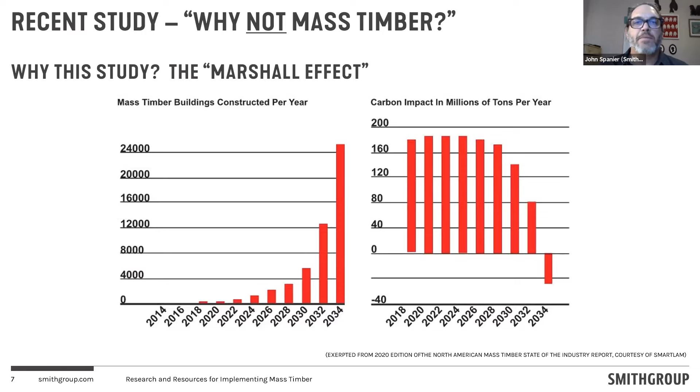Aligned with this is a recently coined Marshall effect that came out of the 2020 edition of the North American Mass Timber State of the Industry Report, which I have links to later in this paper. This Marshall effect describes that if the number of mass timber projects doubled every two years, then by 2034 the North American building industry will be carbon neutral. That's crazy, and it's one of the big reasons why we want mass timber to be a popular construction system.

The big question is, why are we not building more mass timber projects? I've been asking myself this question for a really long time. I decided I just wanted to know, so I reached out to as many clients and industry professionals that would talk to me.

Specifically, I was reaching out to people who had considered mass timber early on in a recent project but ultimately didn't use it, to identify that decision gate early in a project and understand why it didn't happen.

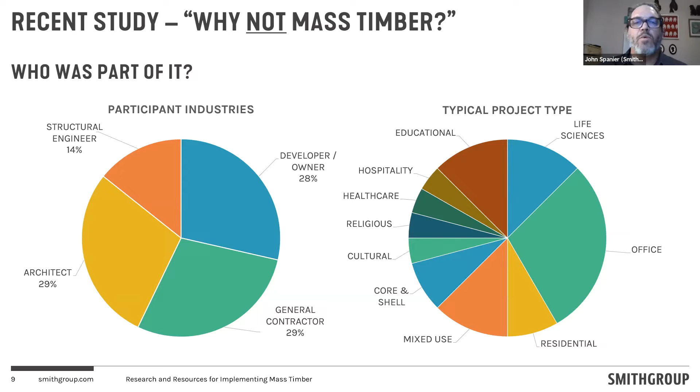The people willing to talk to me include a broad spectrum of people who are part of that decision process. I was lucky enough to talk to colleagues at Harvest Properties, Stanford University, Turner Construction, Build Group Construction, Tom Robinson at Lever Architecture, and colleagues at SmithGroup and Arup, and really grilled them about what had happened recently on projects that hadn't proceeded with mass timber.

The results were these - going over the identified risks and advantages. The main reasons people saw as true obstacles to mass timber are cost and supply chain variability, and the lack of data, both in terms of market value, market placement, user experience, building performance, and that kind of thing.

Also lack of team experience, primarily with general contractors and structural engineers, unfortunately. Another one was the risks to approvals and permitting, and the ongoing struggle to get mass timber codified for use as a seismic or lateral system.

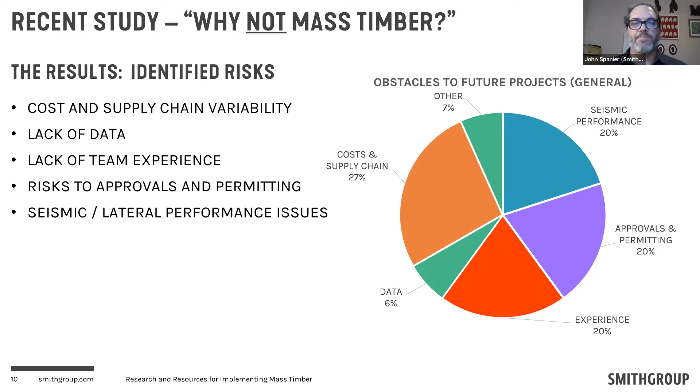I think if you put your client lens on, what we're really looking at is predictability, as far as the advantages that were identified.

Everybody I asked if they wanted to do a mass timber project, 100% of them said yes. There really is a sense of the intrinsic value that mass timber brings to a project. There's an assumption of market and asset value, an assumption of quality, an assumption of a desirable look and feel. There are actually quantifiable construction efficiencies, and there are real carbon advantages. Some of these we have information on, some we don't.

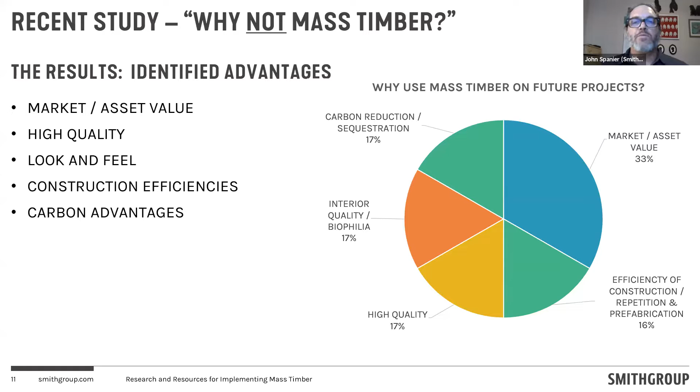Interestingly, I've been lucky enough to be a footnote in an upcoming research paper that Woodworks and the Wood Products Council has done for ClimateWorks. It's hopefully coming soon. We have colleagues from the Woodworks group, Mike Romanowski and Jennifer Cover, also on this call, hopefully available to answer some questions.

They surveyed 84 different projects that had considered using mass timber and ultimately didn't do it. Theirs is way more in depth, tracking these projects for a longer period of time, but it's validating to see that what I've seen so far has been very similar to the results that I got.

One thing I want to stress here, if there's one takeaway you have after listening to this talk, is that we absolutely need to give our clients more predictability. That's the whole thing. If you think about it, you're a client trying to figure out, well, is my project going to be successful?

Is my project going to make money? They need to have understandable information and reliability to be confident in making the decision to take on mass timber. So I'm going to go through these one by one, both the risks and the advantages, and give you a sense of some resources that I think will help you prepare for any upcoming mass timber project you want to take on.

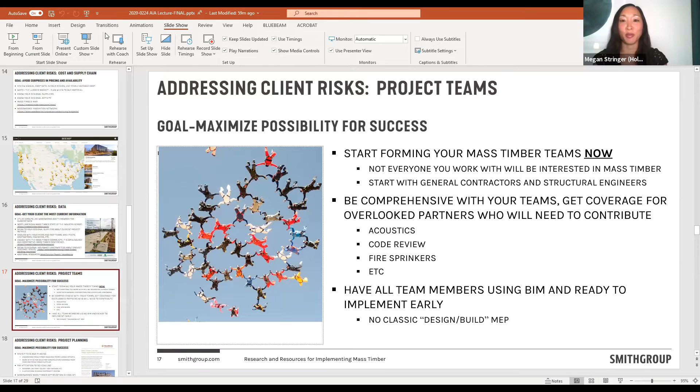Yeah, thank you for doing that. We've been seeing a lot of similar things in our studies. One thing I'll mention is, with wood, a lot of the biogenic carbon aspects and the sequestration and how that should be accounted for is definitely something that, at least among the structural engineering profession, we don't yet have a good consensus on. It's something we're working on within one of the committees I'm involved in, so we should hopefully have a bit more guidance out there, because it's definitely a hot topic in our profession right now.

Hey John, you're back now. Hi, I'm back, I apologize. I don't know what's going on, but hopefully that was the last of it.

Some information: the recent State of the Industry report for North America mass timber is a great resource, a ton of information in there. I can't recommend it enough.

Talk to your regional suppliers, talk with your peers, there's all sorts of stuff. I can talk with Megan, I can talk with my friend Thomas Robinson or whoever is working on these projects, and there's all sorts of shared information we can glean from each other. The mass timber community itself is a great resource just alone, it's very open source and super cooperative. Woodworks is part of that, and the Mass Timber Conference is coming up. I'd highly recommend it, that's a great place to go if you're interested in mass timber.

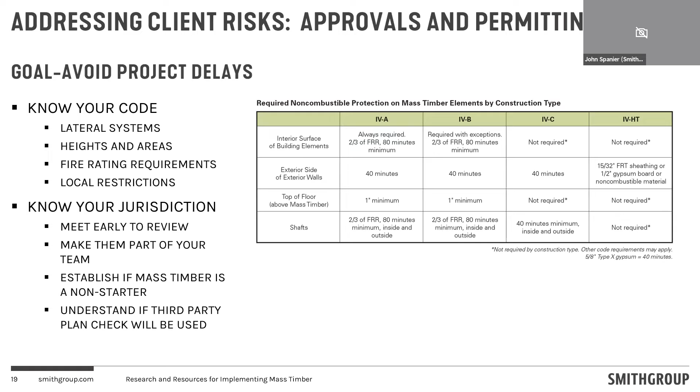Seismic performance. This is one that came up over and over again in the study, and it's really because it's just not codified yet. If you want to use the mass timber lateral system, you have to do your alternate means and methods request. That's lengthy, complicated, peer review, expensive.

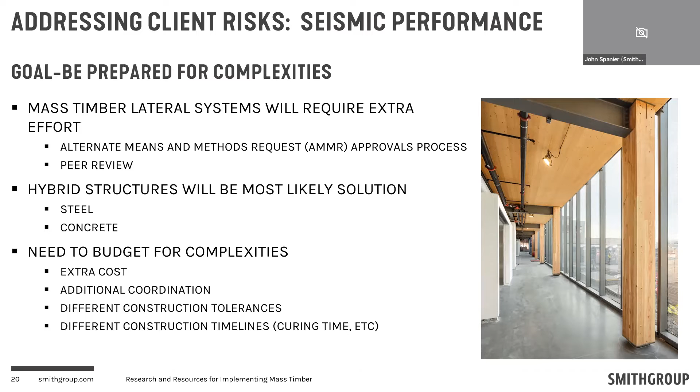Chances are you're going to do a hybrid structure, so you've got to understand what that means. You're going to either use steel or concrete. Those have different advantages, disadvantages, complexities. There's a little extra cost, a little extra coordination, different construction tolerances to keep in mind. Your joints, any connection points, are really critical. And different construction timelines, particularly if you're going to do cast-in-place concrete, it's got to dry. So you've got to figure out how that's going to go up while your wood system components go up much quicker. And they're also water averse, so you don't want to have them up against wet concrete.

Client advantages. There are a lot of great client advantages: value, perceived quality, the look, the feel, construction efficiencies, carbon advantages. The mass timber report is a great place to look at for starting to flesh out the idea of the ownership of a mass timber building. They go through some of the things you want to keep in mind, some of the risks. There's still not a lot of data about this. Hopefully this is going to keep growing.

Quality, right? How do you point out quality? One of the things that came up is it's hard for clients to see projects, to experience projects. So unless there's stuff in your region that you can take people to visit, you've got to convince them and give them metrics around other successful projects.

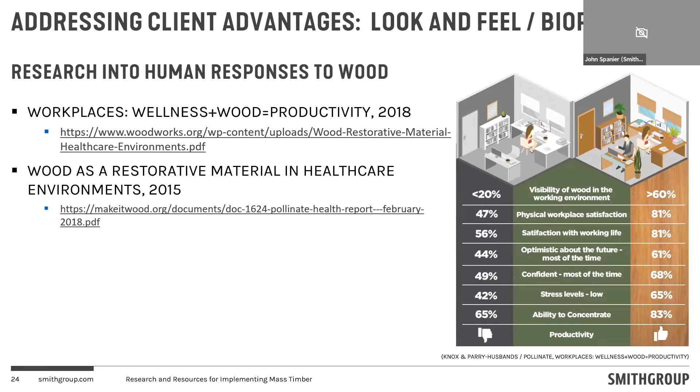Big one: construction efficiencies. This is really where mass timber shines and starts to have a lot of great information. Again, going to the optimization checklist—please read through this, it's really super informative. Understand your structural grid. The difference between mass timber and steel and concrete is a completely different thing, with completely different advantages and strategies for getting an efficient structure. And you can do it in ways that create really open areas.

Holmes Structures has this awesome timber builder optimizer tool—I think Megan's going to show you in a minute. Fast+Epp has this timber bay calculator, a free tool online. Take a look at all these things.

You really have to explore and have a great structural engineer on board who understands these nuances, and be repetitive. If you want to save money on these projects, you can still have a beautiful project and be intelligent about prefabrication. You're going to save money by having the same size shapes of components as much as possible. It's going to make it faster to go together, faster to produce. Significant cost savings can be realized.

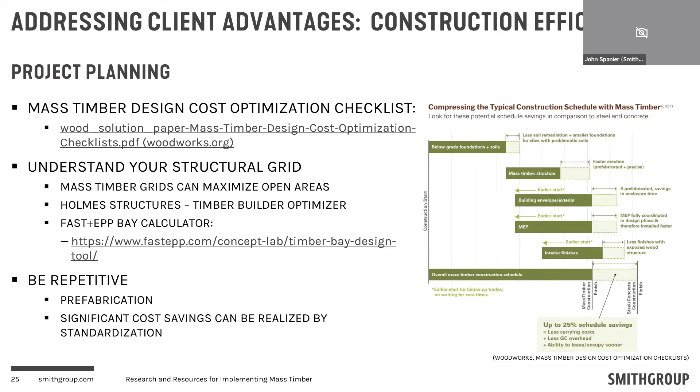It's a great tool to track the carbon impacts of a mass timber project. This pretty much comes to the end of my part of the presentation.

The call to action to you guys: if you're an advocate of mass timber projects, you have to start with your client. This whole thing I'm trying to get across today is you have to put your client hat on and understand where they feel comfortable, where they feel uncomfortable, and come at this with a toolkit, a good team, and a lot of understanding about what's going on in the current marketplace. Hopefully we've given you a little bit to look at and start to develop your understanding about mass timber with this stuff.

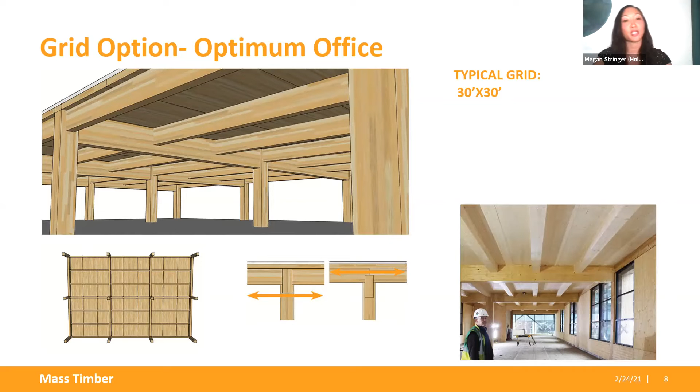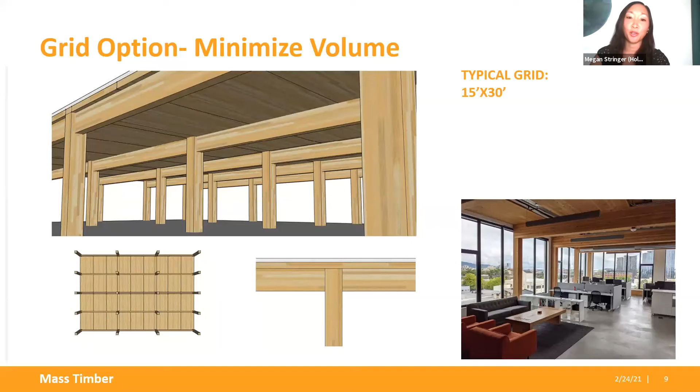The next grid looks at minimizing the volume of lumber, so looking at a much shorter span for that CLT, more in the 15-foot range, which is really the sweet spot for getting a smaller ply thickness panel while still getting a decent span, but looking at your beam spanning 30 feet or more. Again, you can also integrate steel or even precast concrete as elements to span further if that's desired.

And then again, looking at how you can orient your beams in vertical space, you can definitely play around with a lot of MEP integration in doing that.

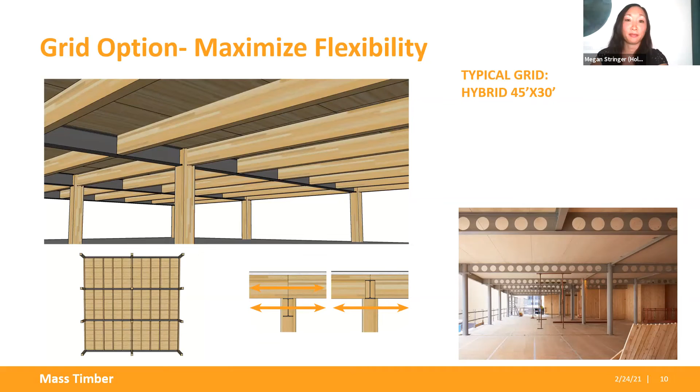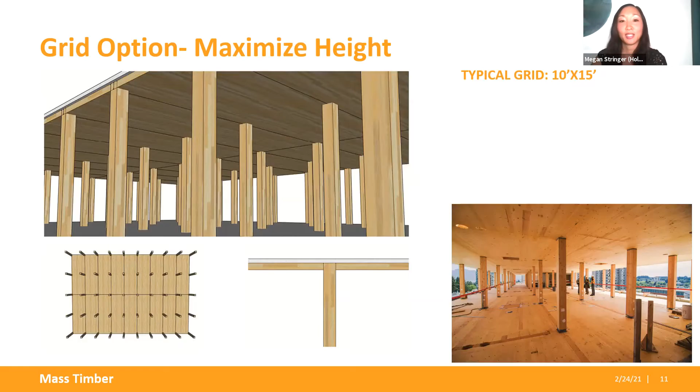Again, also in construction on a couple of these systems, but more up in our Portland projects.

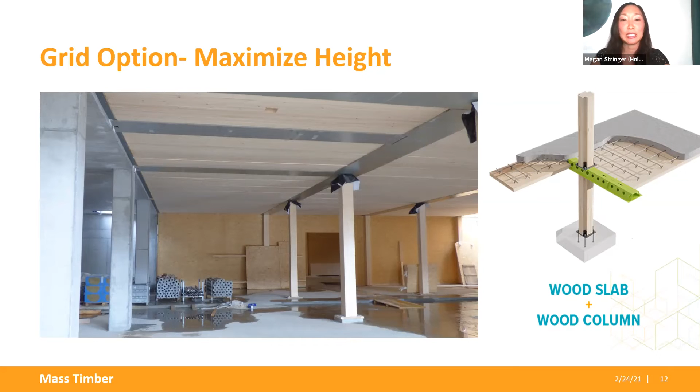In addition to grid, another take on that is podium. A lot of our mass timber projects sit on top of podiums, so trying to think about how you handle transferring out of your mass timber columns at your concrete podium is key to how you lay out your building. This should be thought about early on and should incorporate your structural engineer in those discussions.

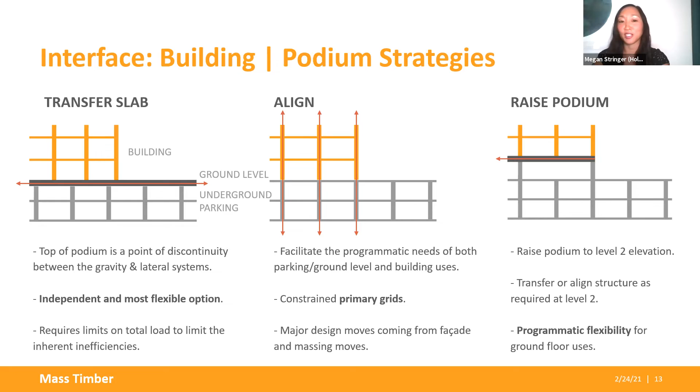The next lesson learned deals with integration across a bunch of different types. First up is MEP integration—this is something we've definitely seen as key to making any mass timber project stick. If you can integrate your MEP into your floor system, you're going to have a much greater likelihood of keeping the mass timber in your project.

Another thing with MEP integration we've been seeing with our projects is that integration needs to happen a lot sooner in the design process. Even in a typical design-build scenario, really wanting to know where all these MEP penetrations want to go is critical, and something that needs to shift in how we design these buildings to make it successful.

We're also seeing in mass timber development a push toward integrating a lot of these services off-site and getting them built in bigger pieces, so that when you're coming onto the construction site, things are just being lifted into place—really trying to leverage the pre-manufactured nature of mass timber.

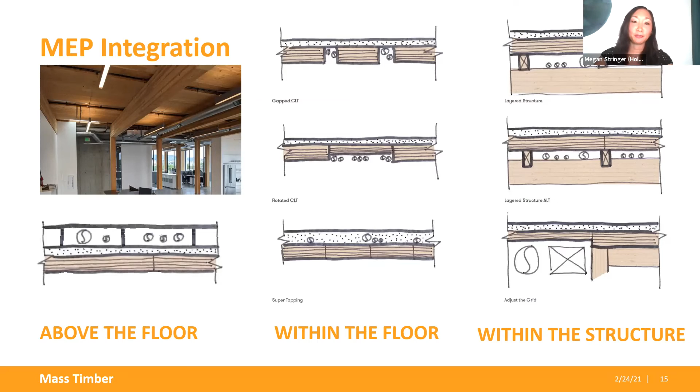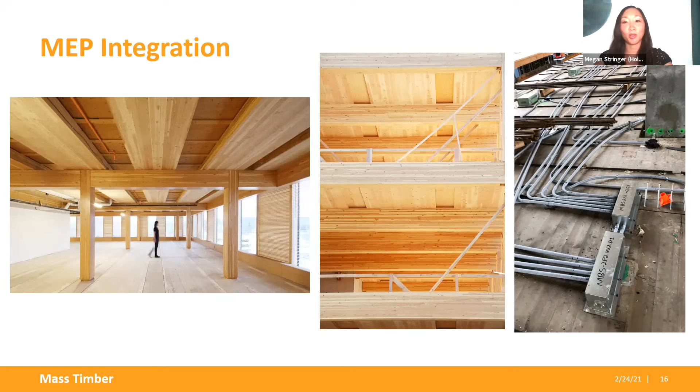Again, I was curious just approximately how many of the projects you're working on right now are design build or various different alternative deliveries? I think all of them are pretty much doing an integrated delivery approach. Only a couple are really design build in that aspect.

So another type of integration is really project teams. I think John touched on this earlier. A successful project is also going to require the right team. We've had some projects that just kind of died because you didn't have the right contractor on board, or just the right team in general. So really trying to find that contractor, supplier, architect, and structural engineer that is the right fit for your project is going to be really key.

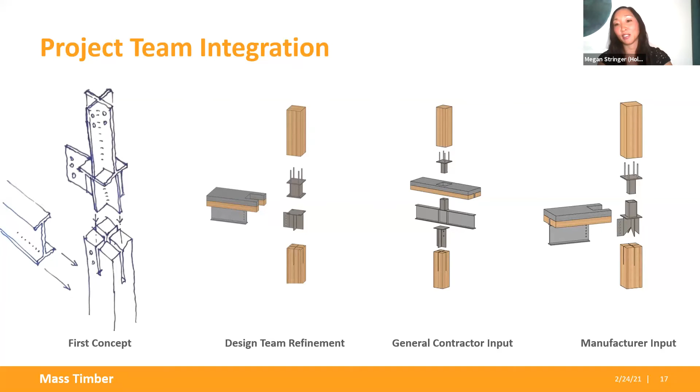And then lastly, we got some manufacturer input, noting the manufacturer's capabilities and how deep of a notch into that column they could actually get with their CNC machine. So we had to change how this was detailed based on their input. I think another big thing is also who owns what in this type of scenario. A lot of our projects have been hybrid systems, not just full mass timber, but having some type of steel or concrete gravity system. We definitely had to pay a lot of attention in some of this detailing, and had to redetail some things once we talked about who was going to be supplying what portions of steel, in this case, for example.

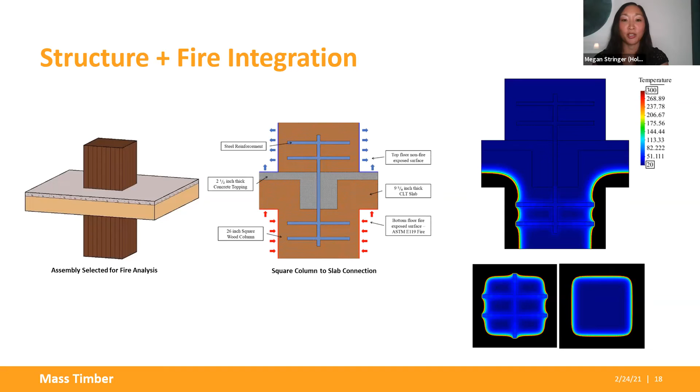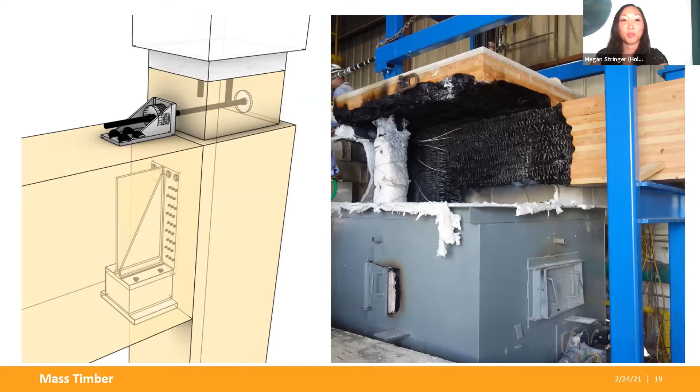I think this is the last type of integration that I'll talk about — really just that structure-fire integration, and how important and critical that's been. It's been something that's made us so successful in our mass timber projects, in that we have Holmes Fire, fire engineers, in all of our offices. We've been working with them jointly on these mass timber projects, because that integration of structure and fire, when we're trying to keep the mass timber exposed as much as we can, is really critical. These are just some examples of how we were able to use their expertise doing fire analyses on some typical connections we had in a project, so that we wouldn't have to introduce any fire rating. And then just some other examples of fire testing that can be done, that we've been a part of on some of our projects as well, just to really study some of these unique and atypical connections — but also given that the research hasn't necessarily caught up to how quickly the design world is pushing these projects. Yeah, it's just an exciting time.

And then this last lessons-learned topic we'll talk about is, I guess, what I termed engineering considerations.

So lateral systems - John mentioned this earlier. What we're seeing a lot in our projects are really hybrid lateral systems. Basically that means sticking with a conventional plywood shear wall, concrete shear wall, or steel braced frame or moment frame. That's been what we've mainly seen, just because CLT isn't strictly codified yet and would have to go through an AMMR process to get approved. You're going to be limited in the height of plywood shear walls, but it's still a viable option in some low-rise buildings. But at that point, if you're building such a low-rise building, we've definitely gotten the question: does mass timber even make sense or pencil out from a cost standpoint? Anyway, we're seeing a bunch of different stuff with lateral systems, but I think we'll start to see more mass timber shear walls coming online.

There is going to be a codified approval for certain mass timber shear walls, but the aspect ratio the shear walls will need to be is not super applicable, so I honestly don't see that taking off once it becomes codified. I guess we'll stick around with some of these hybrid systems for a bit longer, and then utilize mass timber shear walls if your project can afford that AMMR approach.

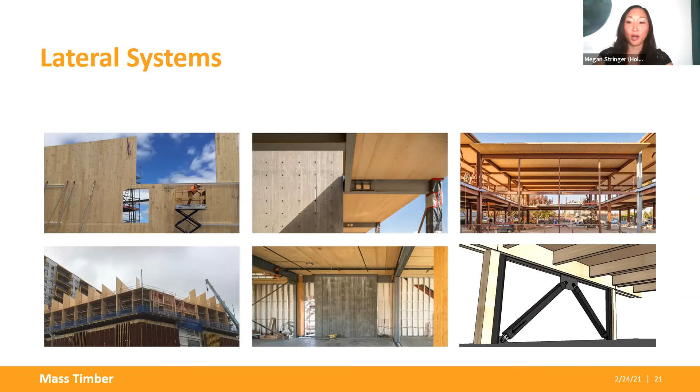Another topic to touch on when looking at these mass timber buildings and how we're now trying to push spans of mass timber further is - this is one of our lab buildings up in Portland, where vibration was a really big concern for the project, and it had some pretty strict goals. So ensuring that your engineering team can run vibration analyses for you on your project is going to be critical to the success of these projects.

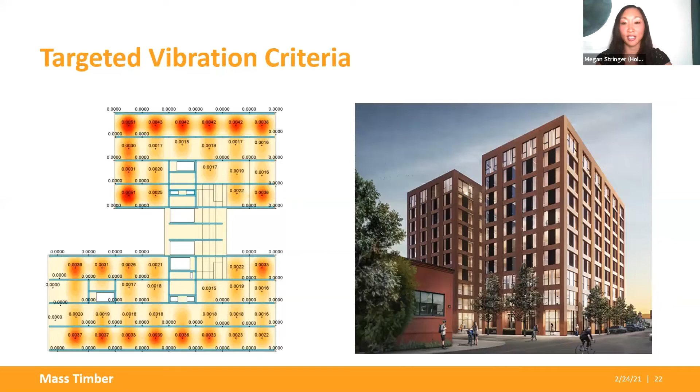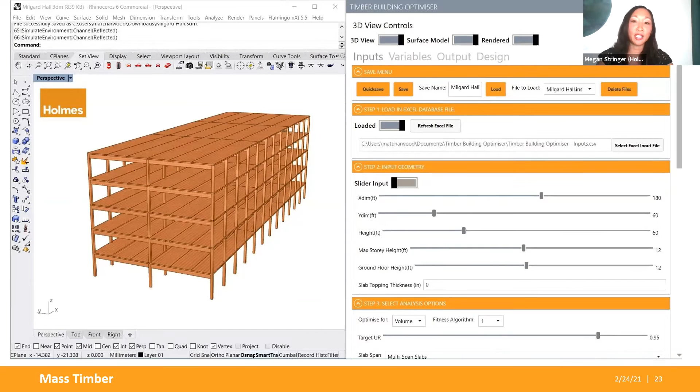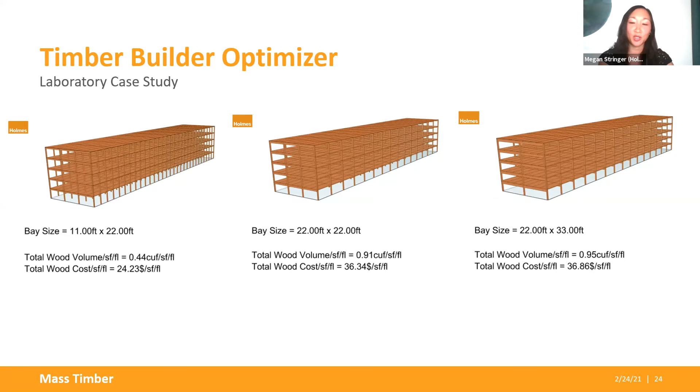What John had mentioned was, given how much mass timber we've been doing, we built an in-house timber optimizer tool that allows you to put in a certain amount of inputs - whether it's grid, number of stories, fire rating required - and it has a bunch of data from pretty much all the main CLT suppliers or mass timber suppliers. It's not just CLT, because we have some MPP and others in here as well, and it spits out very quickly what the most optimum bay sizes and grids are, based on wood volume or even cost. We do have some cost data in there, but I'd say Woodworks probably has the most accurate information on that. It's just something we quickly tried to create and can use on our projects and talk with clients about, to really quickly iterate between different options. It's been a helpful tool that we've been using on a lot of our projects.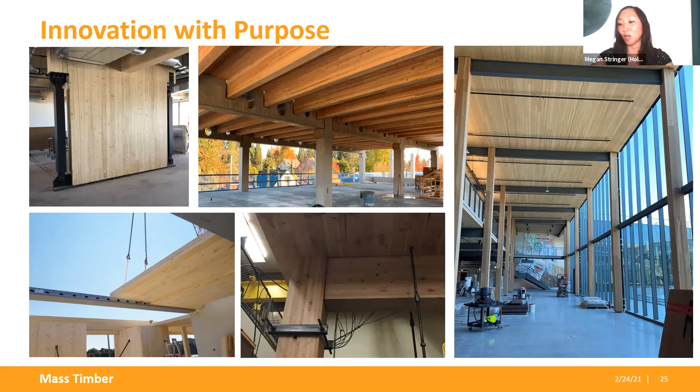So now I'm going to talk about some of our projects. It was hard to pick from all the ones we've got going, but I'll talk to you about two that are basically done and completed, and then two that are in for permit and about to get constructed as we speak.

First up is an example of how we were able to use mass timber as a diaphragm - the structural diaphragm that transfers all the lateral loads out to your seismic elements. This was for the Brentwood Public Library. This project was built back in 2015, 2016, so it's been open for a few years now. One thing that was unique with this project is that it was one of the first mass timber buildings in California.

We were working with Fog Studio Architects, who actually designed the first mass timber building in California, which was just a small project in the Bay Area. It was fun to work with them, and I was excited about mass timber, and Holmes was just pitching in on our projects. For once, we didn't have to explain to the architect what mass timber was.

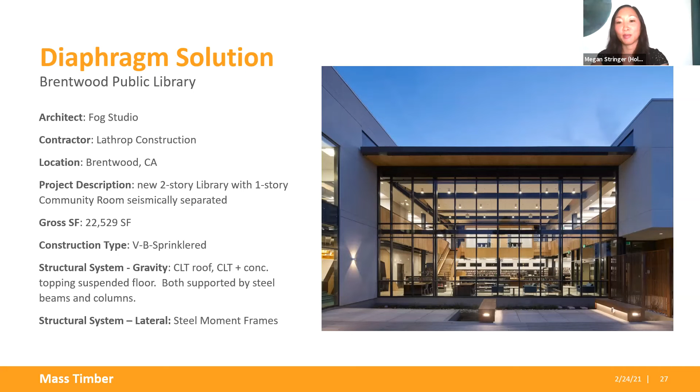Another unique thing is that this was with a contractor who had never used mass timber before, but they were super on board with learning something new, which was exciting. You might not necessarily hear that from all the contractors you work with. The main system for this was CLT for the floors and roof, supported by steel beams with steel moment frames.

Something I love about these photos is that they weren't taken on a lunch break. It really speaks to the nature of just how small the crew required is to construct these mass timber buildings.

You can see from the photos, at least on the left, that the contractor decided to erect the full steel two-story structure at once, and then install the panels. It took a little longer to install the level 2 panels because they had to navigate through the roof steel and those moment frame braces you can see there.

But the roof panels and panel installation went very fast, and we almost missed getting photos of some of these last panels going into place. The contractor, since he had never used it before, had allotted a lot more time in his schedule than it actually took.

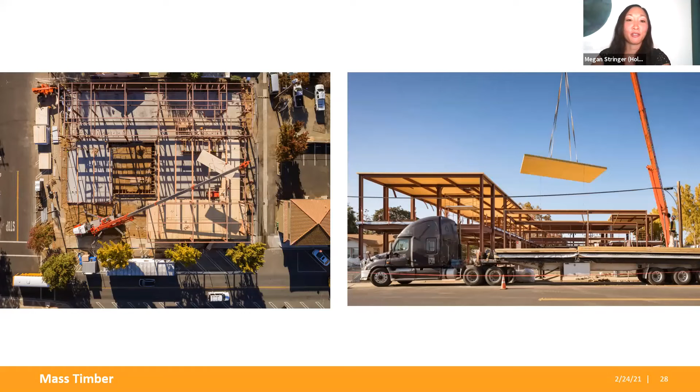Just some pictures of what we were able to do within the diaphragm. The two pictures on the left show the level 2 structure. We had a small concrete topping slab, mainly to handle the stack loading given that it was a library, but were able to run some small conduits in there.

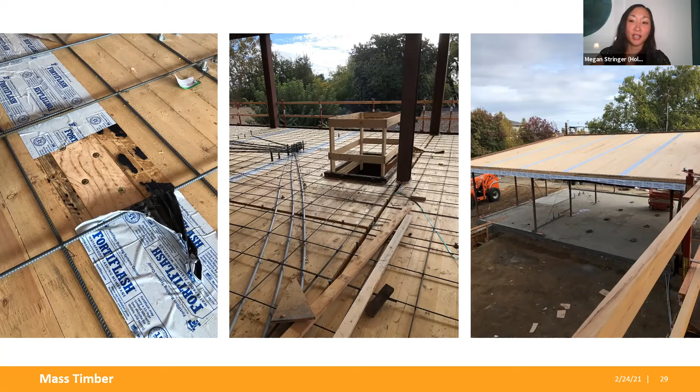Since we were using the mass timber as a diaphragm, you can see we put a plywood spline to connect the panels at their longitudinal joints. That ties the diaphragm together and is able to transfer loads out to your lateral elements.

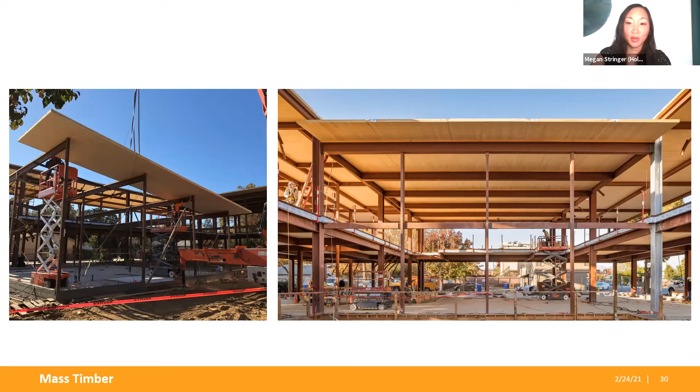Some other pictures in construction. The picture on the left shows the two-way spanning action of cross-laminated timber, which allows you to achieve some pretty cool double cantilevers, and even nice, decent cantilevers in the main direction of the span.

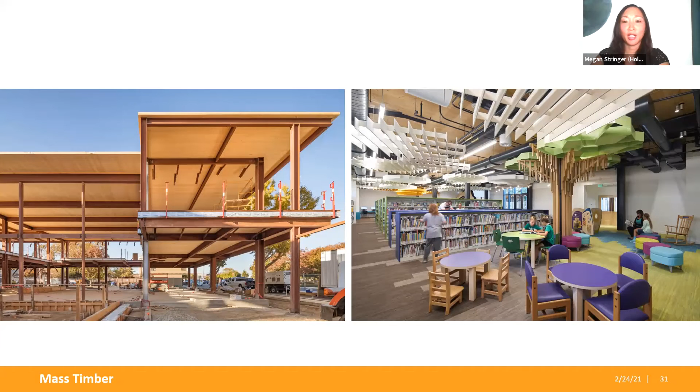Looking at the building after it was built, in its final condition, you can again see mass timber exposed on the exterior. You obviously need to be careful with how you detail that for waterproofing, but it is achievable. A really great example of a small project that was just a super success story.

This next project is an example of a big mass timber corporate campus that's almost done in construction. It's literally supposed to open any day now, probably another month or so, and it will be the largest North American mass timber building constructed. There are already other larger projects in design, but we'll hold that title for a little bit.

A couple interesting things about this project: when we originally looked at the massing, we considered a larger, taller 5 or 6 story office building, or we played around with a scheme we called courtyards — a more low-rise, residential feel with large contiguous floor plates. That's what eventually won out, and wood lends itself really well to that.

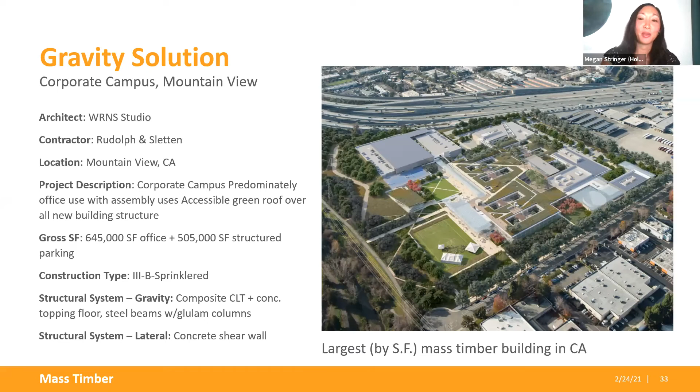Tolerance was a big discussion on this project. As you can imagine, having concrete shear walls, steel and wood was definitely a lot of fun discussions that we had with the contractor. Your mass timber is going to be delivered to pretty much the exact dimensions that you specified, whereas concrete tolerance can be up to an inch or more on your project. So building some of that into your detailing was definitely key.

For this building, given how large it was, the contractor really pushed to build a mock-up structure. This thing was pretty enormous, like 4 times the size of my apartment in San Francisco, but definitely money well spent. They wanted to look at every single different condition that we had in the building.

They also dumped a fire hose on the structure before any of the roofing was put on, because the contractor was convinced this building was going to get dumped on during construction, and they were rightfully very concerned, because it did get rained on a lot when these panels were going up in end of 2018, early 2019. If any of you remember, it was a very wet winter in the Bay Area, so you can see some of that water staining on the mass timber there. The contractor mocked up a bunch of different options for waterproofing, and also how they could mitigate it if, when the inevitable stain did show up, how they could fix that. Definitely money well spent, but I know not every project can afford that type of thing, nor should they.

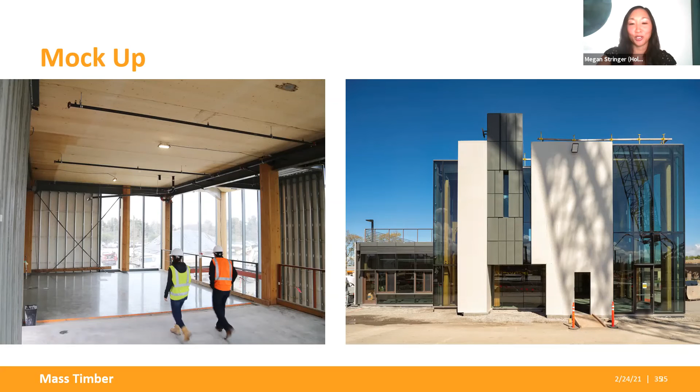Just some photos of some of the early panels going in. The contractor had decided to build this building like a steel building, so they erected the glulam columns first, and you can see those came out with all their steel connectors installed. They installed the beams and then lifted the mass timber into place.

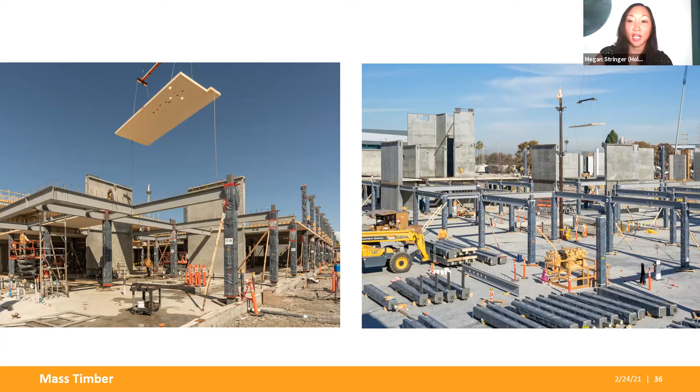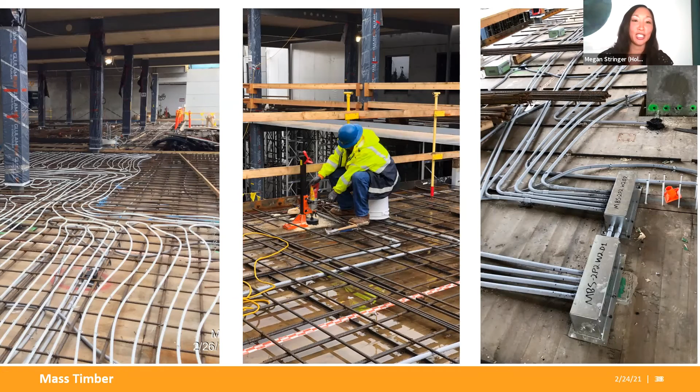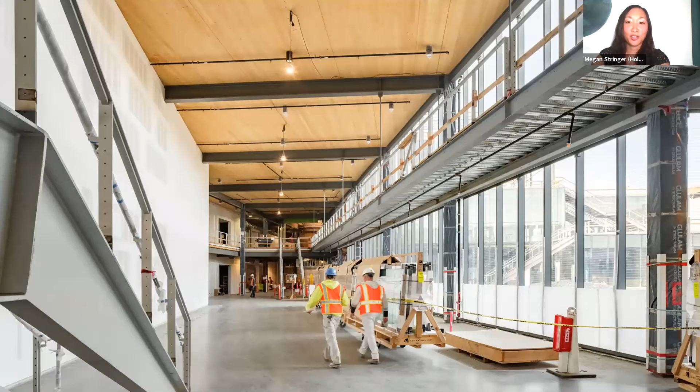Just some photos in construction, and some more, taken recently. As I said, the building is slated to open very soon, but just a really clean aesthetic. I think spending a lot of time on the fundamental parts of the building really helped us have a really successful mass timber installation.

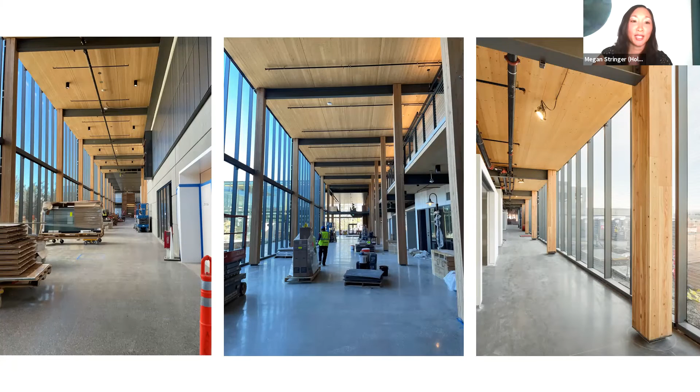Just real quickly, because we're running close on time, I wanted to touch on 2 other projects that are actually about to be constructed. This one is in Marina del Rey. It just completed its permit and is about to be constructed. The construction did get a little halted because of COVID, but it was permitted through LADBS, and I think it's probably one of the first. We were able to work with that jurisdiction, which, as you all know, is one of the toughest in the country, to be able to use the mass timber as a diaphragm. That's technically not codified yet, but it will be in the upcoming NDS. We were able to walk the authority through that whole process and get it permitted. It was very exciting for us, and we're really excited to get construction started.

So again, another hybrid system, seeing the CLT supported by steel girders as well as glulam beams and steel columns, and that integrates really well with the lateral system of the buckling restrained brace frame.

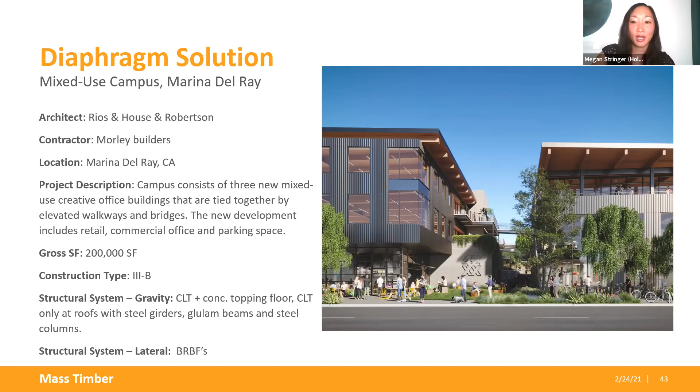This last example I wanted to touch on was actually a small example of where we were able to get gravity and lateral in a building. This is a public housing project of ours out in Sacramento. We just got our plan check comments back for this.

It's just one of the first projects in Sacramento using mass timber. It is 5 stories, so it was able to utilize both plywood shear walls and mass timber shear walls. We were able to do that without an AMMR, but had to design the CLT shear walls that were only located at level 1 of this building and are exposed, but just had to take a pretty big hit on the seismic ductility factor that we used to design it. Anyway, just another successful example of being able to get that mass timber into the project.

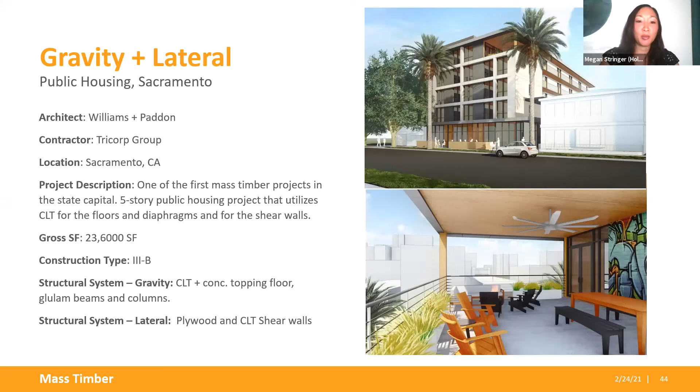So with that, I think John and I really just wanted to chat with you more and answer any of your questions. Maybe I'll stop sharing and we can see your faces.

Alexandra had a question about when can we use Holmes Timber Building Optimizer? That tool is awesome, thank you. You can definitely shoot me an email, I'd be happy to talk with you. We haven't yet released that. I know a lot of people have been releasing a lot of their built tools for the public. I don't know, we're actually focused on trying to get more options optimized, not just post and beam, but some other options as well for mass timber. I think we're focusing on that before we'd consider getting it released. But anyway, I'd be happy to show you it and answer any questions you have for your projects.

It looks like you had answered a question about recommendation for roof deck application. Do you want to expand on that? I'm not sure if I totally understand the question, but it sounds like there's an interest in having maybe an occupied roof on top of a CLT panel roof. If that's the case, what I've seen in the past is you got to be careful about where your moisture ends up in relation to the wood roofing. So you might do a CLT, an applied membrane, then some kind of protection. It really depends on how you're doing your insulation. You could do a cement, you could do a PVC, and then bison pedestals on top of that. I think there's a lot of potential options for an assembly. It would really just depend on the particulars of what you're using and where you are.